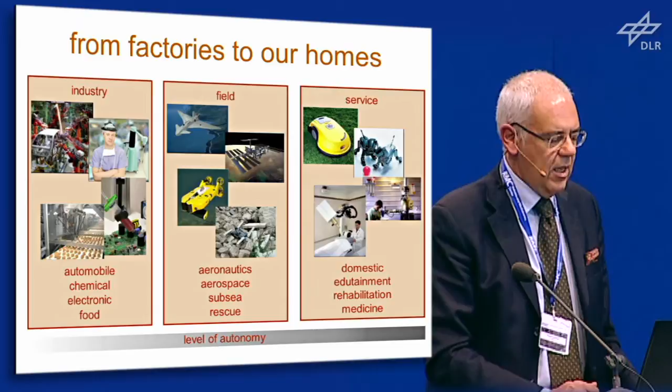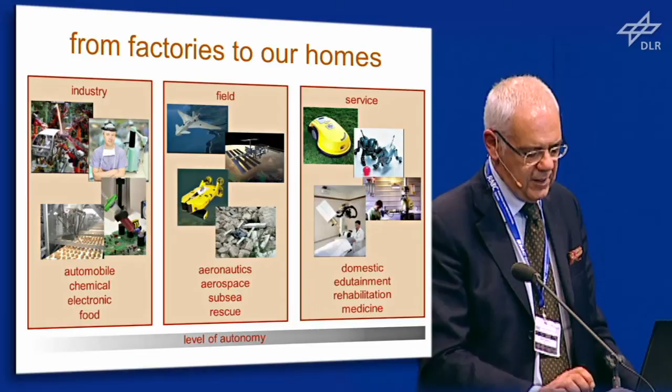Field robots have been very challenging, but much attention has been spent recently on service robotics, especially robots for humans, where not only autonomy is an issue, but also safety and dependability are important issues. And it's not only a technical matter, as I will emphasize later.

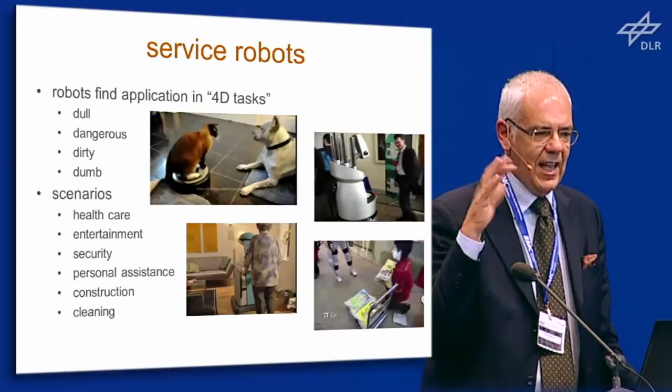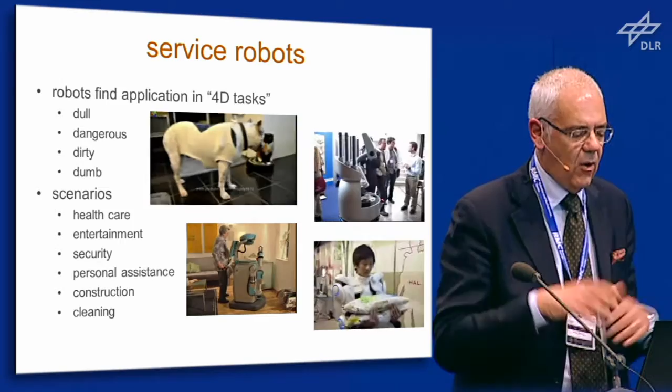Martin mentioned the cool video of Roomba with a cat, the cat chasing the dog. I have it here, it's pretty cool. So robots find application in what we may call 4D tasks, the 4D standing for dull, dangerous, dirty, and dumb. These are just some scenarios where service robots may find application.

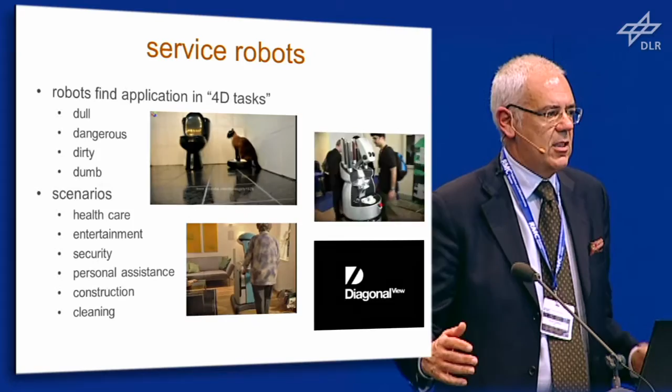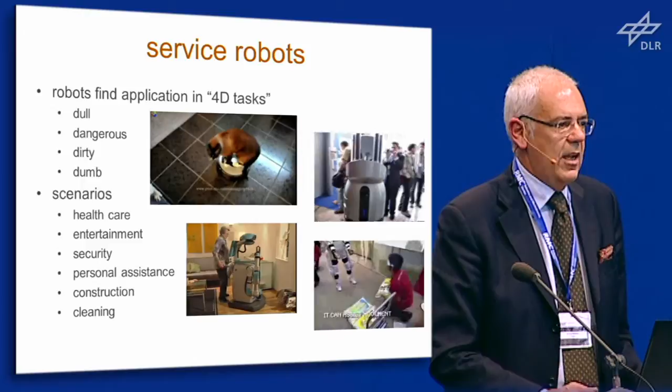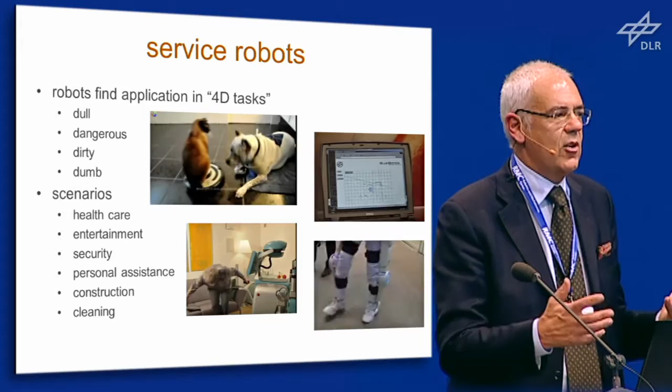Personally, as a control engineer, I've always been fascinated by the hybrid assistive limb. When I tried the suit myself, I was really impressed to see that when I was thinking to move my arm, the exoskeleton would lift up my arm, and this was really fascinating. When I had some students from my kids' classes coming to this big science event in Napoli, and they saw it, they said, oh, that's cool, that's really amazing, when they saw the hybrid assistive limb.

On one hand, we the technicians are looking at biomechanics, at neurosciences, at psychology, because we want to gain more knowledge from human beings. At the same time, we can represent a wonderful arena, a wonderful gymnasium, for scientists to test their hypotheses and validate their models. The fallout of this virtuous circle can be measured in terms of the humanoids, the zoomorphic robots, the prostheses, the cyborgs, and also in terms of micro-nano.

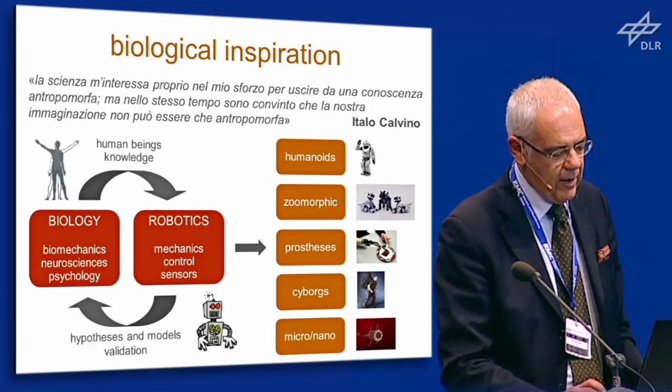When we speak about personal robots, I've had the opportunity to interact often with journalists. And the journalists, they always want the funny, or sexy, stories about robots. I will go back to this point later.

Humanoids clearly capture the media much more than the mechatronics technology, although behind a humanoid there is a lot of mechatronics. The new version of Asimo was launched a couple of weeks ago and was in the media. So I got a phone call from an Italian journalist writing for La Repubblica and the Espresso magazine, and she was asking me, why, are we ready to have humanoids in our homes?

I said, no, of course not. So why are people so fascinated by humanoids? That's true, but Asimo represents a wonderful research platform to test the most advanced algorithms. It's not by chance that the same balancing technique used in Asimo is also used in the U3X, the personal mobility device, which was presented by Honda last October in Times Square as a sort of urban mobility vehicle.

Speaking about zoomorphic robots, you very well know Paro. Paro is the robot seal, designed by Takanori Shibata at AIST as a sort of entertainment robot for elderly people. But a couple of years ago, I discovered a project with neuroscientists not far from where I live.

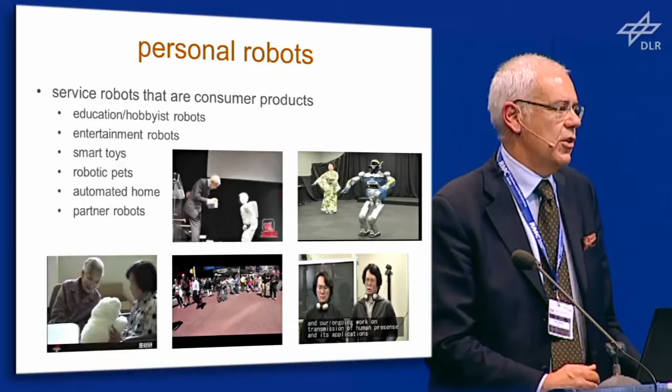So there are some issues which have to be considered carefully if we are ever thinking about having personal robots. So what is happening actually in robotics?

The 50 years were mentioned, and being a native of 1959, together with many folks in this room, we celebrated this 50 years of robotics and also our birthday.

By the dawn of the new millennium, robotics has been undergoing a major transformation in scope and dimension, and has really expanded into challenges of the human world. Human-centered and lifelike robotics are where the progress will happen.

We have a number of core methodologies and technologies which may be considered well assessed. For further progress, it's now time for an outreach toward other communities, and it's there that we can find room for the new generation of robots, which are expected to safely and dependably cohabit with humans in homes, in workplaces, in communities, and so forth.

Looking beyond, here's a non-exhaustive list which in my opinion represents research challenges already being addressed in a number of research projects: soft robotics, biomechanics, haptics, human-robot interaction in this broader sense, what is being labeled as robot co-x, neurosciences.

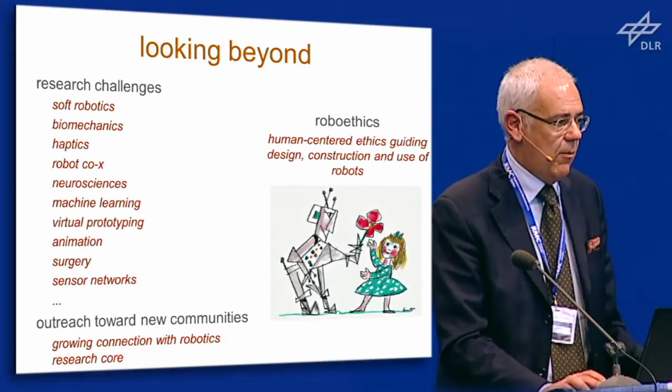There we talked not only about technical issues, but also about ethical, legal, and societal issues, and the so-called roboethics, which is the human-centered ethics guiding the design, construction, and use of robots. So those who are designing, realizing, and using robots have a number of careful issues to consider.

Looking beyond, I think the fact that this community has evolved and reached a level of maturity, as was underlined this morning already by Oussama in his historical videos, is reflected in a sort of milestone that we all achieved together, and I see many faces of scholars who contributed to this project.

This is the Handbook of Robotics, which appeared in 2008, and I used to say that after my kids, and even before anything else, this was the biggest professional achievement, in which I spent 6 years together with Oussama and the whole robotics community.

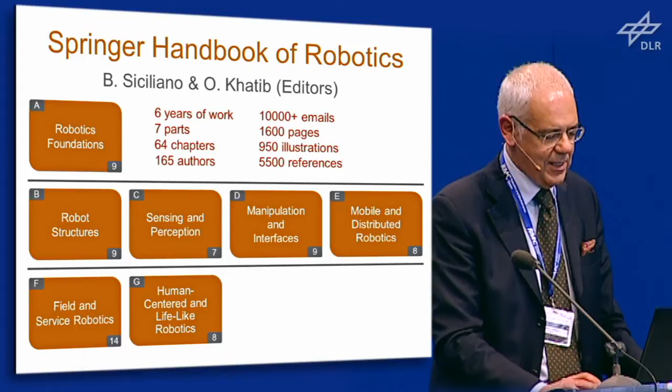Springer was so happy that the book received the prestigious PROSE Award that when we were in Anchorage last year for ICRA, we could fly our private jet to land on the glacier of McKinley in the Denali National Park. That's robotics, just a joke, but it's Photoshop. But by chance, the colors of the aircraft were exactly the colors of the handbook - these are the original colors of the airline. It was fun to be together with some folks at the base of McKinley.

You may wish to know, when my wife heard this she was mad at me because she has kind of hectic memories of the many after hours and weekends spent chasing and working on the handbook.

So Oussama visited me three weeks ago and we started working on the second edition of the handbook, in which we will accomplish a critical review of the chapters, an update of existing contents because robotics is moving so fast, and also addition of new contents. The main novelty will be the inclusion of multimedia in terms of video, animation, and software, and the handbook is expected to be published in 2013.

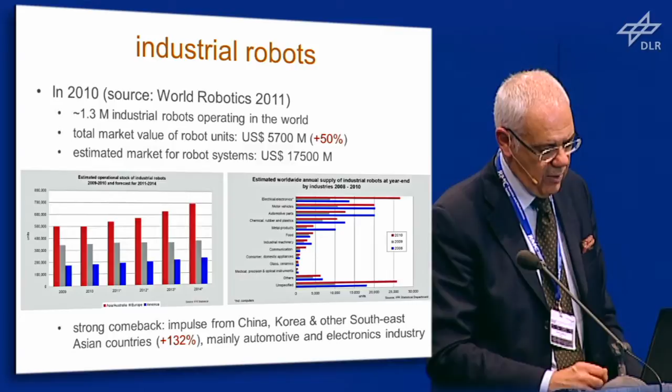This is the data in terms of the operational stock of industrial robots projected over 2014 for the three areas. The red is Asia and Australia, the gray is Europe, and the blue is America. As you can see from the applications, it's always the case that mainly automotive and electronic industry are the big drivers in terms of number of units in use for classic industrial robots.

So those were the industrial robots. If we look at the same report, it also gives data about service robots, and here it's usually the case to distinguish between professional service robots and personal service robots. As you can see, the increase in professional service robots has been moderate, and most units were installed for defense and field applications, like discussed in the plenary talk by Martin. Whereas there's been a substantial increase in terms of personal service robots, including entertainment and leisure robots.

So this is not only household robots, like for instance Roomba, but also those kind of cheap toys, a few hundred bucks if you wish, which are selling well.

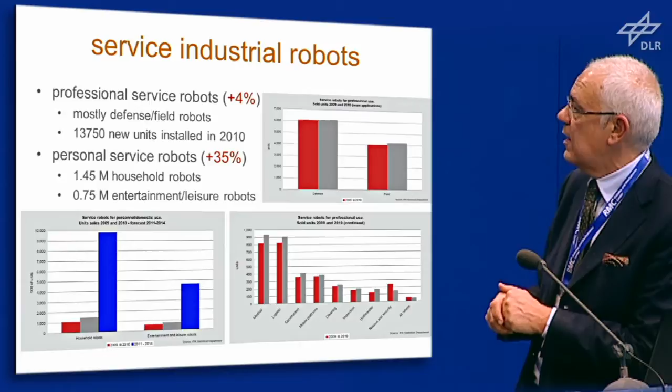As you can see in the diagram on top, it's mostly defense and field, but there is also room, on a different order of magnitude, for medical, logistic, construction, mobile platform, cleaning, inspection, underwater, rescue and security, and others in terms of professional service robots.

A few words about the research agenda. These were the figures from the market, but of course, where are we heading for? Where is our roadmap in terms of achieving the goal of expanding the robot market?

These are some notes about what's happening in the 3 or 4 major geographical areas. It's quite bizarre that the first industrial robots were designed and built in the US, and despite the entrepreneurial culture of the US, they actually matured elsewhere, to the point there are nearly no more industrial robot manufacturers in the US.

Most robotic research is funded through military, space and security programs, although thanks to the effort of a number of scholars led by Henrik Christensen, who is the Kuka Chair Professor and Director of the Robotics and Intelligent Machines at Georgia Tech - it's a pity he cannot be with us today - the current boost is represented by the National Robotics Initiative.

In Japan, the situation is slightly different because there's been a keen strategy for creating new industries, and this includes robotics as one of the 7 areas of emphasis. I was sharing this data with Hirochika Inoue, who is also a member of the advisory board of one of our European projects, ECHORD. There's always been close collaboration between government, academia, and industry.

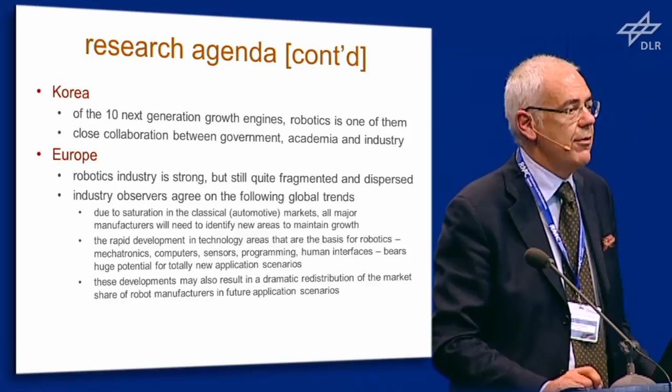At the same time, industry observers agree on global trends: all major manufacturers, including the big ones, have to identify new areas to maintain growth, and rapid technology development in areas relevant for robotics - mechatronics, computers, sensors, programming and human interface - builds huge potential toward new application scenarios very far even from our widest imagination. This may result in a dramatic redistribution of market share among robot manufacturers in future application scenarios.

I'm sure all the Europeans in this room are familiar with the so-called European Strategic Research Agenda. I saw Rainer Bischoff somewhere during the coffee break - I think he's around here - and he's been the coordinator of the European Technology Platform. You can probe further on the website.

One of the visible, tangible results of the coordination action for robotics in Europe, the CARE coordination action, was the strategic research agenda, in which 5 main areas were identified as having good potential for the robotics market. But the common denominator recognized by this roadmap exercise was the converging technologies. Even though these are 5 separate areas, you really need a lot of cross-fertilization among them.

This is the well-known list with the 8 SRA commandments. I can read them verbatim, but this can be found easily on the website - you can download the PDF of the strategic research agenda if you are interested.

I'm talking especially to our guests from outside Europe if they want to be updated. The nice thing is that this agenda is being updated continuously. There are questionnaires sent to the different stakeholders, so this will be a continuous exercise for midterm and long-term road mapping of robotics up to 2030, twenty years from now, if I remember correctly.

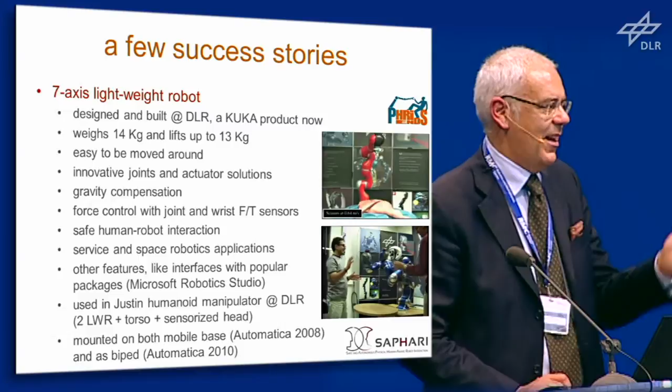I just want to mention two projects on which we have cooperated with DLR - our connection is not only for soccer, but also for robotics. This is the PHRIENDS project, run by Antonio Bicchi at University of Pisa in Framework Program 6.

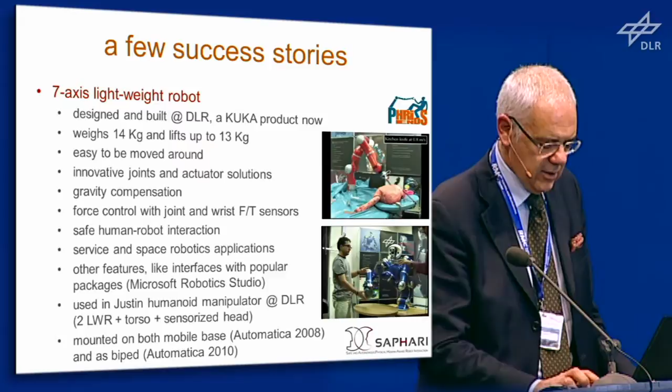The good news is that two weeks ago we had a new project kicked off in Rome, coordinated by Alessandro De Luca, who was also a visiting scientist here at the Institute for one year with the Humboldt grant. This is SAPHARI - Safe and Autonomous Physical Human-Aware Robot Interaction - in which the same partners as PHRIENDS, plus some other partners, are involved. I've also seen some people here from Dongheui Lee at Technical University of Munich.

Other success stories can be recognized in terms of the force control system. ABB was the first in Europe - though to be honest, having worked extensively on force control myself, I should mention that Fanuc was actually the first robot manufacturer to include force control as a commercial product in one of their industrial robots.

But ABB had customers that demanded a full 6 degrees of freedom force torque sensor, and this promises to become a standard very soon for their common products. We also worked in Italy in cooperation with Comau, the third robot manufacturer in Europe after KUKA and ABB, on a number of algorithms for automatic identification of robot payloads.

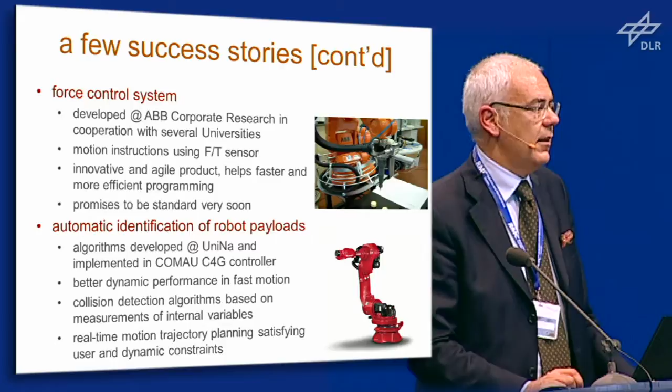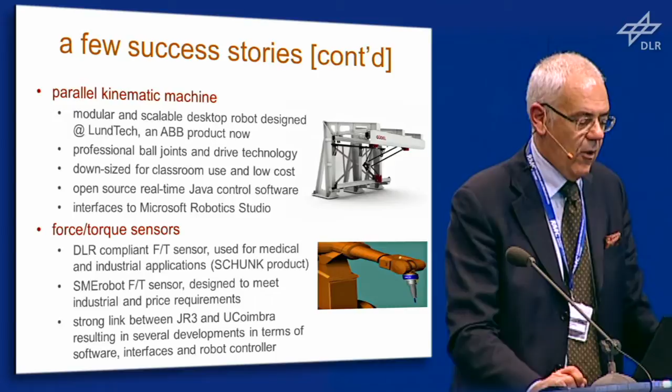Yet another success story is the Delta design by Reymond Clavel and also the people in Montpellier, which was sold to ABB as the Flex Picker parallel kinematic machine. There's also another design at Lundtech in terms of a modular and scalable desktop robot, which is now an ABB product. Force torque sensors are, of course, also very important.

I've always had brainstorming discussions with Gerd and the people in his group about enriching the sensory set. And of course, it all starts from the force torque sensor in terms of the interaction with the environment.

The lesson learned, as was underlined this morning, was that cooperation often resulted in the recognition of new problem areas on the part of academia, which in turn encouraged creative thinking toward new potential neighboring applications on the part of industry.

So there's always this kind of dichotomy, market orientation versus long-term orientation. This continued result-oriented dialogue also led to a build-up of trust. Compared to 15, 20 years ago, thanks to these success stories, there's now more trust. Even issues like intellectual property rights and public sharing have decreased in importance, as there's more of a trend toward openness, not being scared to publish results in the literature.

So step by step, this kind of continuous interaction, exchange of ideas is also leading toward practical product development versus the pure visionary methodology theory that we in academia used to think about. We don't care about what comes next in the next step.

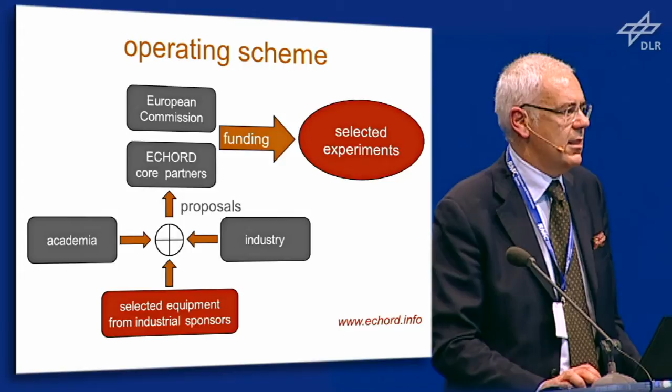The average size, to give an idea for those of you not familiar with ECHORD, is an experiment of about 300,000 euros for a duration of up to 18 months. This has proven quite successful in terms of tightening the cooperation between academia and industry.

And still about the wish, the desire to bridge the gap, I should mention another current initiative. Once again is Rainer Bischoff from KUKA, and I also saw Miss Anne Wendel from EUnited Robotics earlier in the audience. This is euRobotics, a coordination action which is the logical stem from EURON, the old European Robotics Research Network, and the technology platform that I mentioned.

All the stakeholders are contributing to this coordination action in terms of identifying market-relevant research and development in robotics, how to innovate in robotics thanks to technology transfer, and how to ultimately create new business.

I want to conclude this presentation with a few words about the face of European robotics, because I've always suffered from the fact that the image of European research, having interacted with it, I'm often in charge of dissemination in one of the European projects, so PR and social relationships is sort of my natural attitude, including with journalists. In my opinion, shared with many colleagues and friends, the image of European research does not represent the quality and quantity of work done.

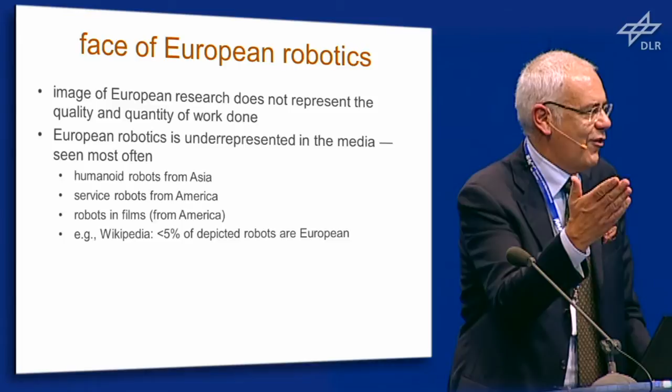If you go to Wikipedia, you will be stunned to see that less than 5% of the depicted robots are European. This is by no means corresponding to the real thing, in terms of the beautiful mechatronics and robotics realizations that we have seen. And I just want to...

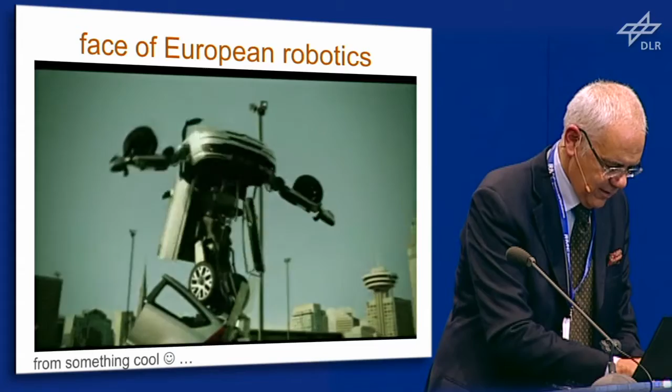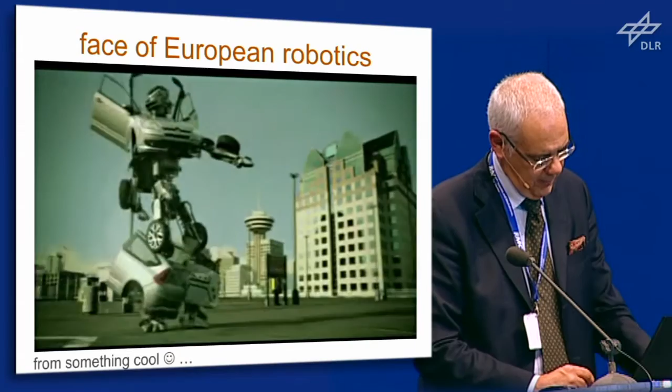This is a commercial from 4 or 5 years ago. The new Citroën C4, alive with technology.

So this is the Citroën C4 car. Citroën is part of the PSA group. And look at this other commercial, which appeared a few months ago. Actually, a student showed it to me. I had missed it. And look at this other commercial.

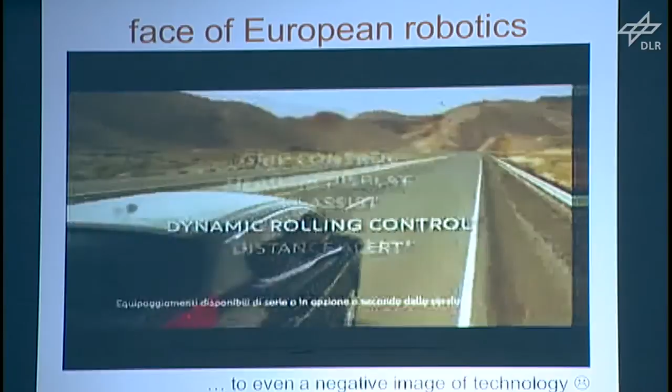It's more fun to drive a car.

I mean, this is quite something wrong. Why was it the case that 5 years ago, this is the same industrial group, PSA, 5 years ago robots were cool and it was the car transformer. 5 years later, it's in a kind of negative sense.

I come from a country where the power of media has been quite an issue. I was always embarrassed as a scientist to go around the world, even to represent the Robotics and Automation Society of IEEE as president, knowing that back home we would have this kind of tycoon, which is too gentle a word.

But last week I was at a conference in Enschede, this nice workshop on human-friendly robotics. Just by chance, we were having the social dinner, and the announcement was made that he would resign. Of course, the following day when I gave my keynote, I was kind of celebrating.

But the power of media is much more than we think. I think there's an influence also on the science, ultimately leading to the market, because this gives a really negative image of robotics. So dissemination, establishing a brand, is important.

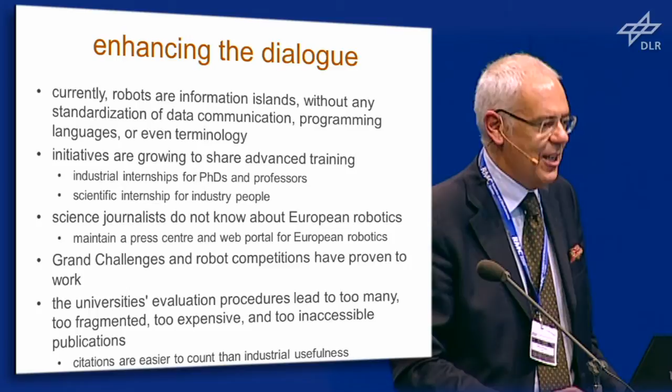It's quite obvious that we spend a lot of time getting our H-index and publications, but sometimes in terms of industrial usefulness of having an H-index of, I think, 34 or 35, which is my H-index, in terms of useful industrial impact, that's another issue.

I want to finish by mentioning an ongoing initiative. Actually, this symposium, Anne, correct me if I'm wrong, also belongs to it—just one week before, but it was so prestigious that this is actually the kickoff. I think we may say so, because it's the first listed on the website.

If you go to robotics-week.eu, this is the European Robotics Week, which has actually been kicked off a week ahead with a preview with this symposium. This was promoted by the Robotics Coordination Action. We were really astonished to see 18 countries, more than 125 organizations, and more than 340 events, with the lion's share being Italy, Germany, and Spain, if I remember correctly, in terms of number of events.

So those events include school visits with lectures on robotics, guided tours like open houses for pupils, open labs, exhibitions, challenges, and robots in action on public squares.

I'd just like to conclude by quoting Bernd Liepert, the CEO of KUKA Labs and also the chair of euRobotics, verbatim from his words in the press release: 'Robots save jobs in Europe. Robotics keep production in Europe competitive. Robots will become assistants in industrial settings and in service areas.'